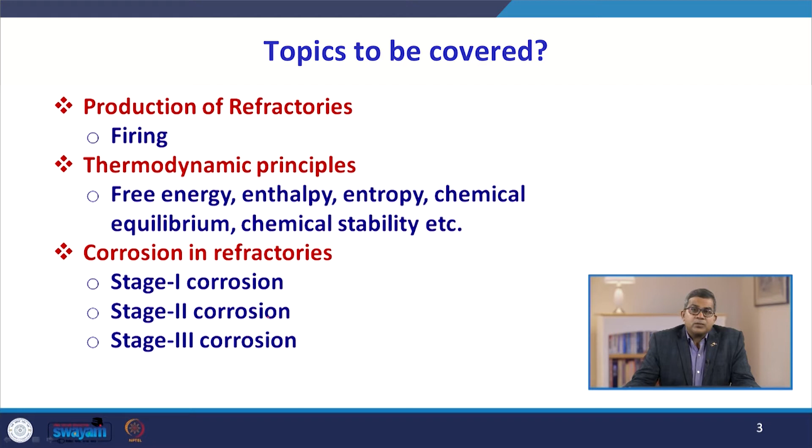In this lecture we are going to discuss the concept of production of refractories. Under this we will discuss the firing aspect, then the thermodynamic principle, which is the theoretical backbone of refractories. Under this we will discuss free energy, enthalpy, entropy, chemical equilibrium, chemical stability, and then the different stages of corrosion - stage 1, stage 2, and stage 3 corrosion. So let us start with the firing.

It is the final stage in brick making, and formerly beehive kilns were used for firing. Now newly developed furnaces, those used today, a number of furnaces are arranged side by side.

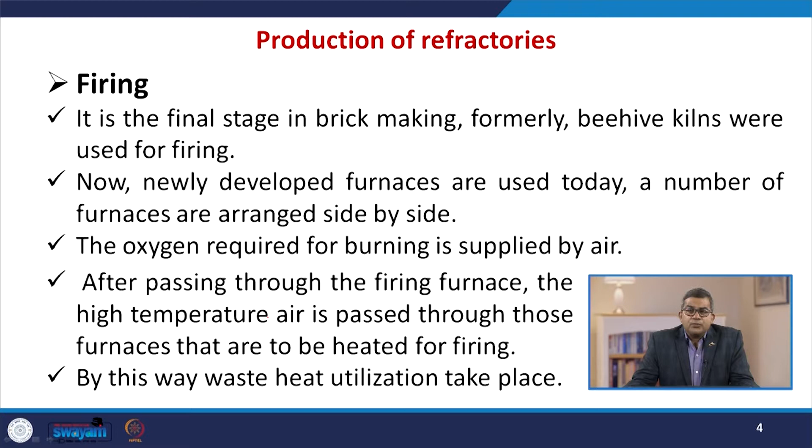Since during firing oxygen is the key component, the oxygen required for burning is usually supplied through air. After passing through the firing furnace, the high temperature air is passed through those furnaces that are to be heated for firing. This way waste heat utilization takes place.

Second type of furnace used for firing is similar to the tunnel kiln, which we discussed in the previous lecture, used for drying. In this, the stock moves through tunnel kilns which are thermodynamically very efficient counterflow heat exchangers. The firing zone is in the middle of the kiln's length, and the secondary air enters from the exit end.

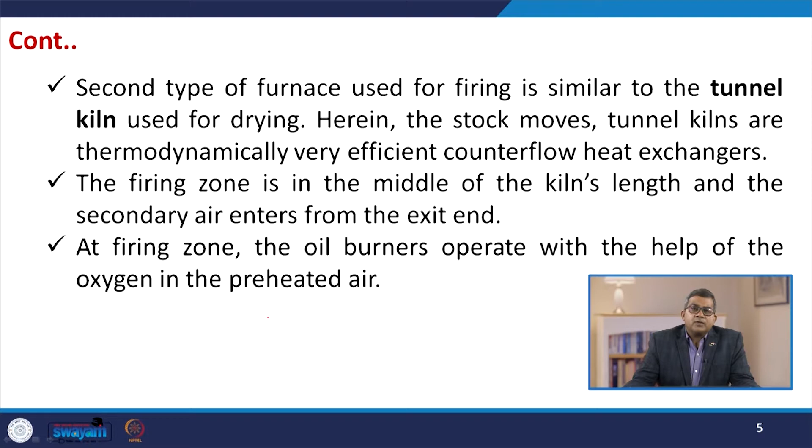At the firing zone, the oil burner usually operates with the help of oxygen in the preheated air. From the firing zone, the combustion products carry heat and pass through the preheating zone. As the green bricks pass through this zone, they absorb heat from combustion products and are preheated. The firing temperature is usually maintained at least as high as the working temperature, for long enough to ensure all possible reactions are completed and dimensional stability is attained.

In recent years, in situ firing has been introduced, that is, the bricks are not separately fired. The green bricks are made and equipment such as a furnace is built, and during the operation of the furnace, the bricks get fired.

Here you see this is the tunnel kiln. As we discussed previously, there is a preheating zone, a firing zone, and a cooling zone, and the movement usually goes in this particular direction. This figure shows the cross section of the firing zone - here you see the gas or oil burner, with the help of a sand seal.

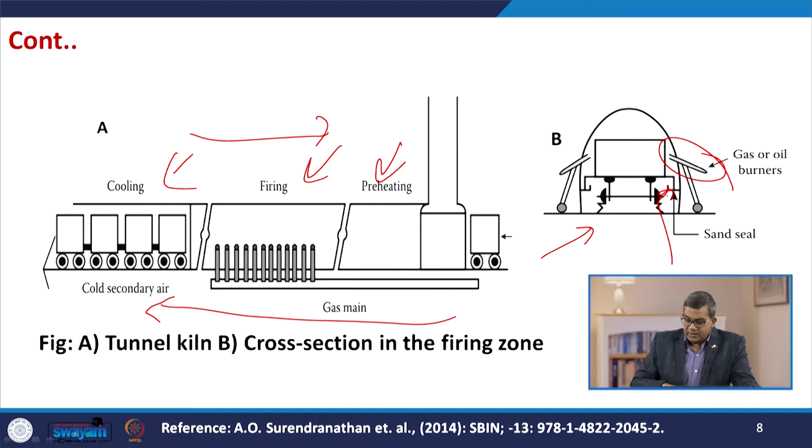Now let us discuss the thermodynamic principles. The refractories are meant to be exposed to high temperature, which causes many changes that result from the refractories' reaction with the environment. The environment can be in the form of solid, liquid, or gas. The reaction takes place where the refractories and environment make contact.

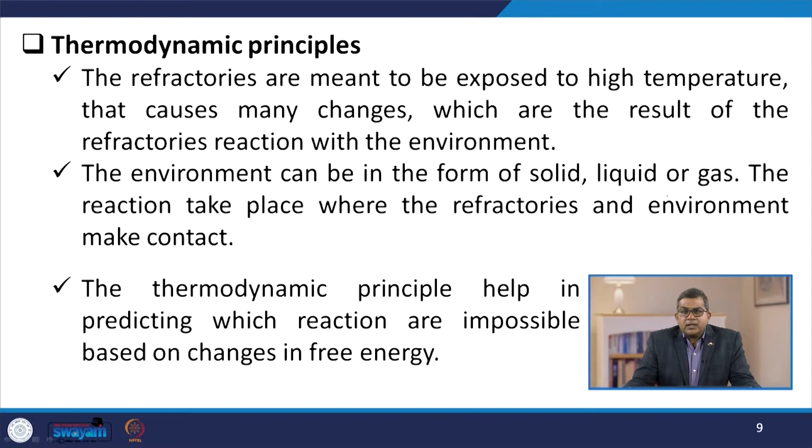The thermodynamic principle helps in predicting which reactions are impossible based on changes in free energy. It is obtained by subtracting the free energy of the reactant from the free energy of the product. In the case where the free energy change is positive, it is impossible for such a reaction to take place spontaneously. This happens because any system will try to acquire a state of lowest energy.

Therefore, the free energy becomes an important term in the field of thermodynamics. Now, let us talk about the free energy. What is defined by free energy? This can be seen in the Gibbs free energy function, which consists of two terms, enthalpy and entropy.

Let us have a brief outlook about the enthalpy. The enthalpy of a compound at any temperature is its heat of formation from its element at that particular temperature. Now, at constant pressure, the enthalpy of a substance can be defined as the heat absorbed or released by it.

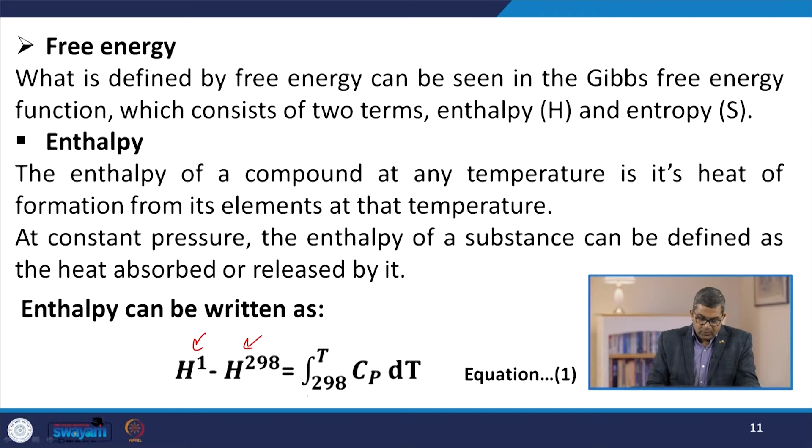Now, enthalpy, you can write the enthalpy as HT minus H298, that is at 298 Kelvin temperature, is equal to the integration from 298 to T of Cp dt, and that is equation number 1.

Now, Cp is the heat capacity at constant pressure, which can be written in the form of change in enthalpy with respect to temperature at constant pressure. So Cp is equal to dH over dT at constant pressure, that is equation number 2.

Now, if we integrate this equation at two different temperatures, say from T1 to T2, or the standard temperature 298 Kelvin and T, the equation for enthalpy can be obtained.

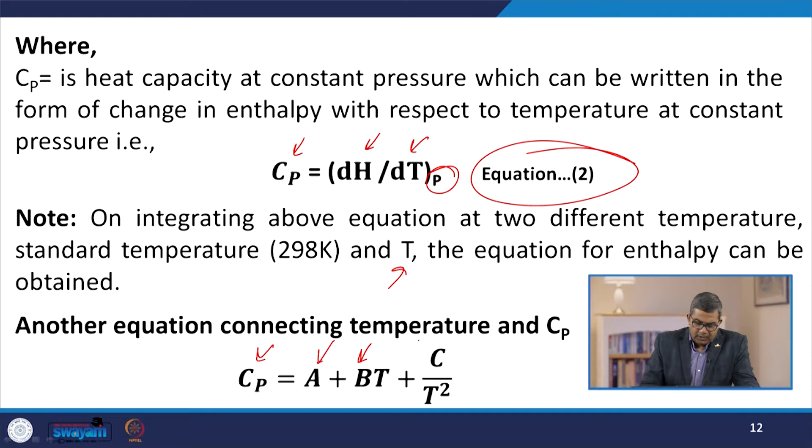Now, another equation connecting the temperature and Cp. Cp is equal to A plus BT plus C over T square. Here, A, B, C are constants.

Entropy measures the degree of disorder in the system. Higher the degree of disorder, higher will be the entropy. Degree of disorder increases with the amount of heat absorbed by the system. Thus, entropy at any temperature is given as the ratio of heat absorbed reversibly by the system and the temperature.

So, in a broad spectrum, entropy can be represented as S is equal to Q over T. In the microscopic zone, the Boltzmann equation is preferred, where K is constant and omega is the measure of randomness. So it can be represented as S is equal to K ln omega.

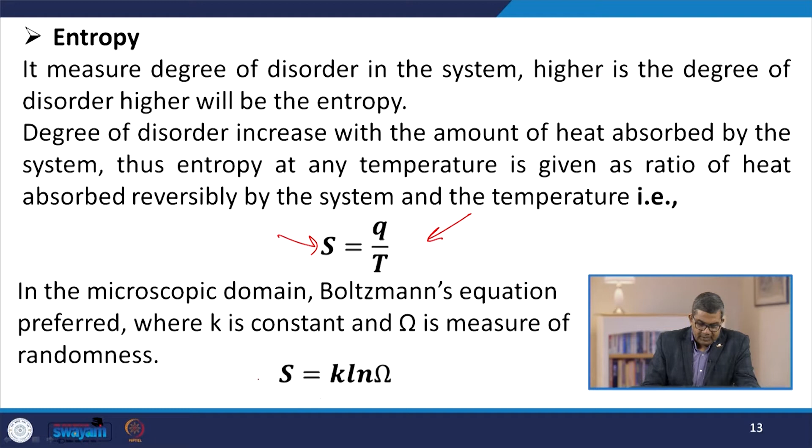Now, entropy can arise by different means, such as configurational entropy, represented as Sc. This is related to the different configuration of atoms in a crystalline lattice. Then thermal entropy, St, this arises from the thermal energy levels possessed by the atom.

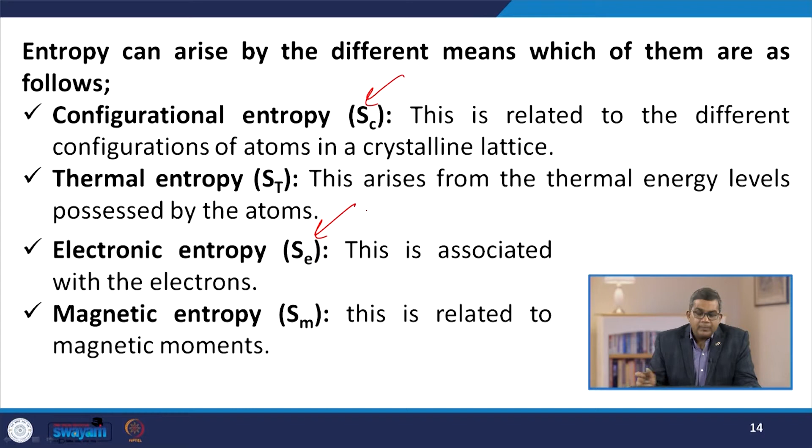Then electronic entropy, represented by Se, this is associated with the electrons. Then the magnetic entropy Sm, this is related to the magnetic moment. Then the dielectric entropy Sd, this concerns the dielectric moment.

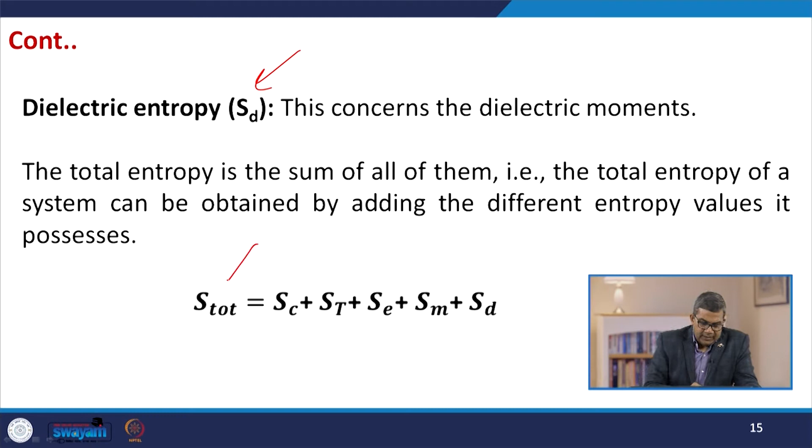The total entropy is the sum of all of them. That is, the total entropy of a system can be obtained by addition of the different entropy values it possesses, like S total is Sc plus St plus Se plus Sm plus Sd.

Let us talk about free energy. Now, the free energy determines the stability of any system, and the stability is associated with equilibrium. At equilibrium, the system will be at its lowest free energy value. The free energy is determined by the equation G is equal to H minus TS.

Now here the S represents the total entropy of the system. If any change takes place in the free energy at constant temperature, this equation can be written as delta G is equal to delta H minus T delta S.

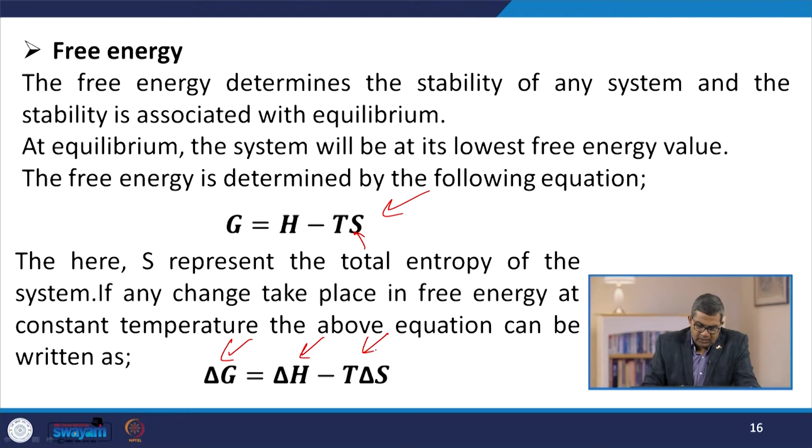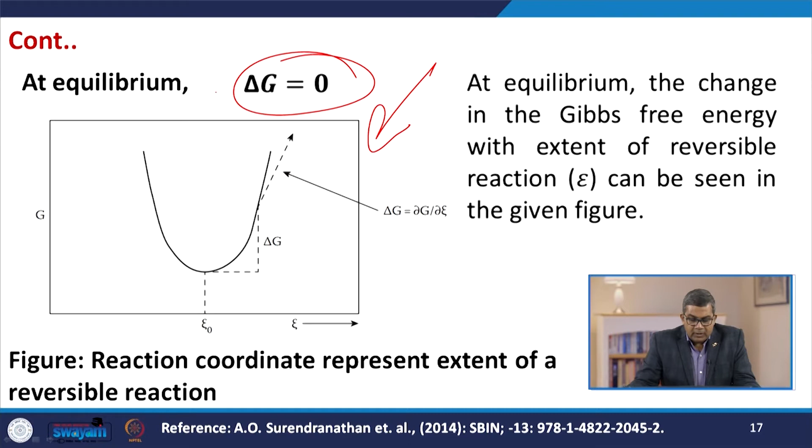So now here at equilibrium, the change in the Gibbs free energy, and this delta G refers to the change in Gibbs free energy. So at equilibrium, the change in the Gibbs free energy with the extent of reversible reaction psi can be seen in this particular figure. Now at equilibrium, it is quite evident that delta G is equal to 0.

Now let us talk about the chemical equilibrium. It is associated with the chemical equation. Now to explain, let us consider a chemical reaction. Let us say that half X2 in the gaseous form, plus M in the solid form, gives MX in the solid form.

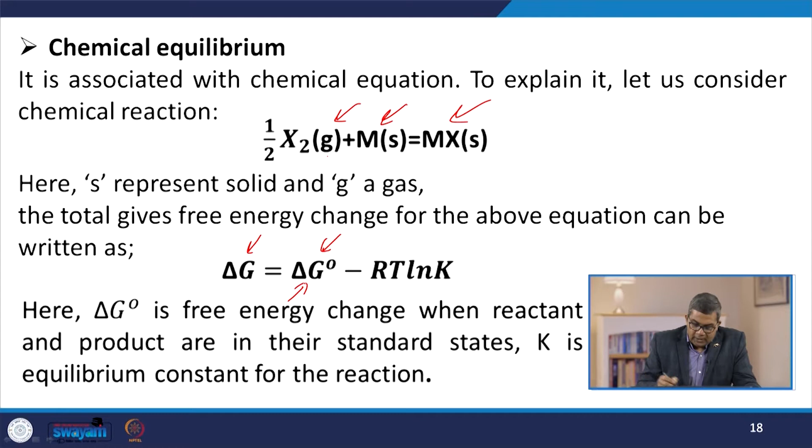Now this gives the free energy change for the above equation. This can be written as delta G, that is the change in the Gibbs free energy, is equal to delta G naught minus RT ln K. Here, delta G naught is the free energy change when reactant and product are in their standard state, and K is the equilibrium constant for the reaction.

Now the equilibrium constant K for this particular reaction can be written as K is equal to AMX over AM into PX2 to the power half. That is the mass action expression.

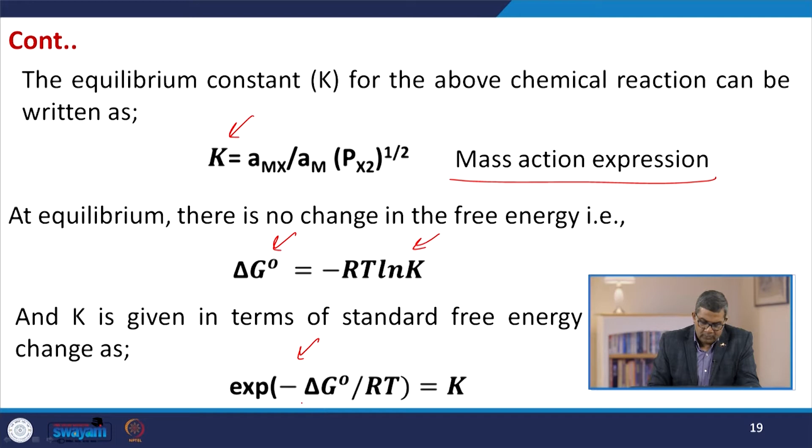Now at equilibrium, as we understand, there is no change in the free energy, and delta G naught is equal to minus RT ln K, where K is given in terms of the standard free energy change, and it can be expressed as K is equal to exponential of minus delta G naught over RT.

Now let us consider the oxidation of any metal M. If it forms two types of oxides like MOZ and MOY, where Y is greater than Z, consider the oxidation reaction of M to form its lower oxide: M plus Z by 2 O2 is equal to MOZ. Let the standard free energy for this reaction be delta G1 naught.

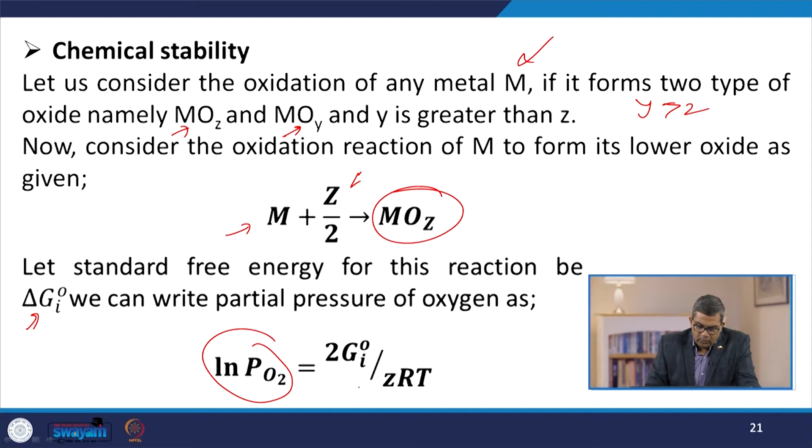So we can write the partial pressure of oxygen as ln PO2 naught is equal to 2 delta G1 naught over ZRT. Now further oxidation of MOZ gives MOY: 2 over Y minus Z into MOZ plus O2 is equal to 2 over Y minus Z MOY.

Now the corresponding partial pressure of oxygen can be represented as ln PO2 is equal to 2 delta G2 naught over ZRT. Here delta G2 naught value is given as delta G2 naught is equal to 2 over Y minus Z delta GMOY naught minus delta G1 naught.

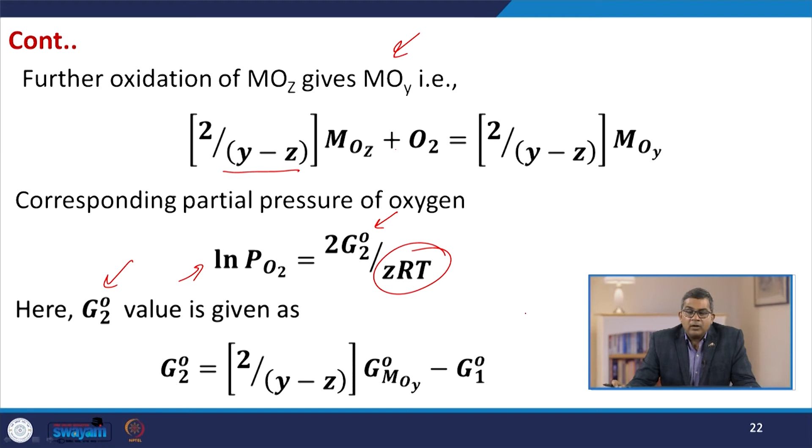This G naught represents the standard condition. In this equation, delta GMOY naught is the standard free energy change for the formation of MOY. Thus, the chemical stability domain for MOZ at temperature T lies between the partial pressures of oxygen corresponding to delta G1 naught and delta G2 naught.

Now let's talk about the corrosion of refractories. Refractories are used at elevated temperatures for structural purposes, and in many cases to contain a high temperature corrosive environment. This corrosive environment usually contains liquid, that is in the melted phase, and that participates in chemical reaction with the refractory at elevated temperatures, resulting in refractory consumption or wear. The oxidation and reduction state of the environment can participate in and influence the chemical reaction.

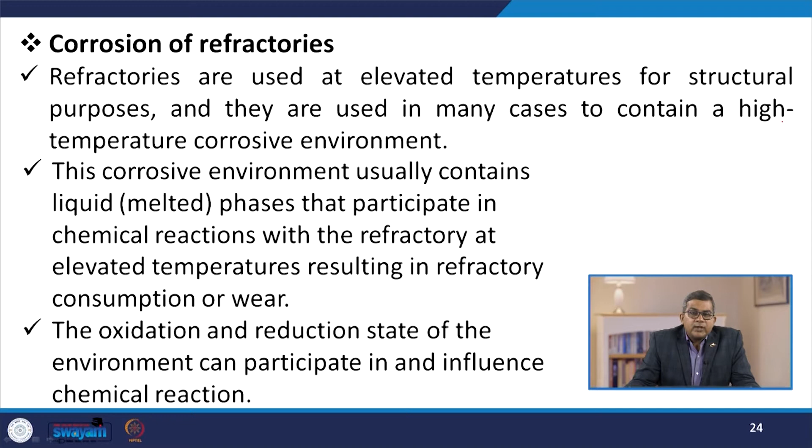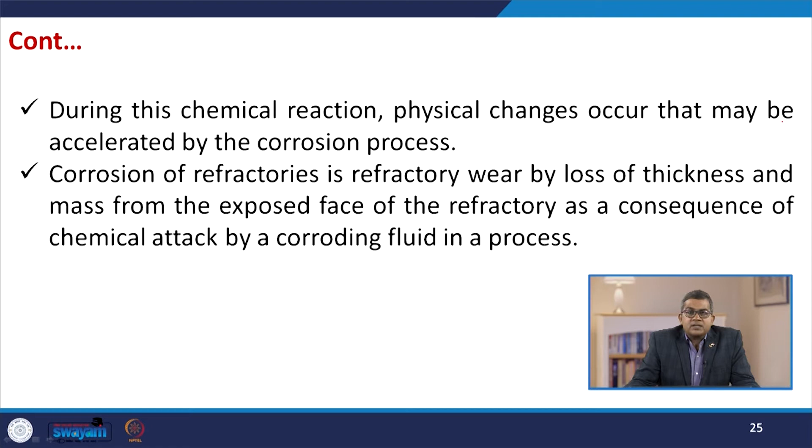During this chemical reaction, physical changes occur that may be accelerated by the corrosion process. Corrosion of refractories is the refractory wear by loss of thickness and mass from the exposed face of the refractory, as a consequence of chemical attack by a corroding fluid in a process. In this, the refractory and corroding fluid react together, approaching chemical equilibrium in the zone of contact between the refractory and the fluid.

The phase equilibrium diagram can be used to analyze the corrosion situation and to predict the chemical strategies to minimize the corrosion and wear rates.

Now, while discussing corrosion, let's talk briefly about the fundamental principles of corrosion. There are fortunately a few fundamental principles that the investigator can apply to any corrosion situation. The first fundamental principle is on refractory and slag compatibility.

The first fundamental principle is that acid refractories tend to resist acid slag better than basic slag, and conversely the basic refractories tend to resist basic slag better than acid slags.

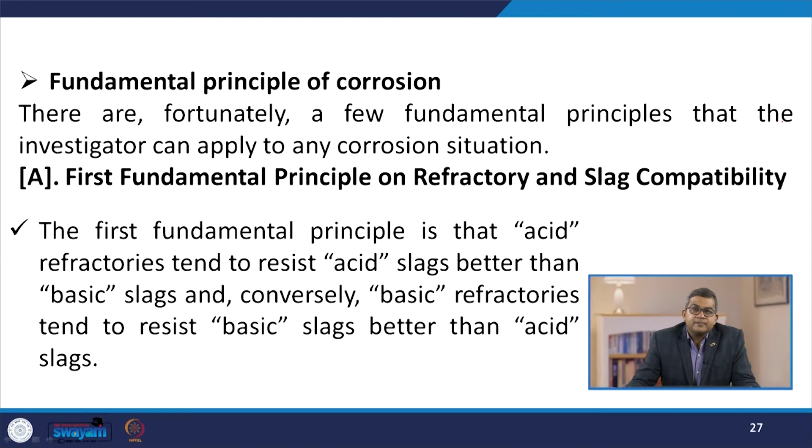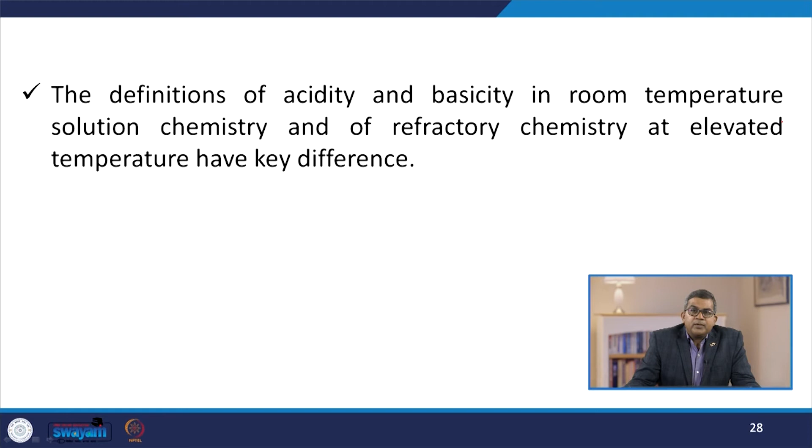The definition of acidity and basicity in room temperature solutions and in refractory chemistry at elevated temperature have a key difference. Now, the definition of acidity and basicity in solution chemistry at room temperature.

An acid contains an excess of hydrogen ions H+ over hydroxyl ions OH-, considering the baseline defined as neutrality at pH of 7. An acidic substance contributes hydrogen ions to a chemical solution to make it more acidic, whereas a basic substance contributes hydroxyl ions to make it more basic.

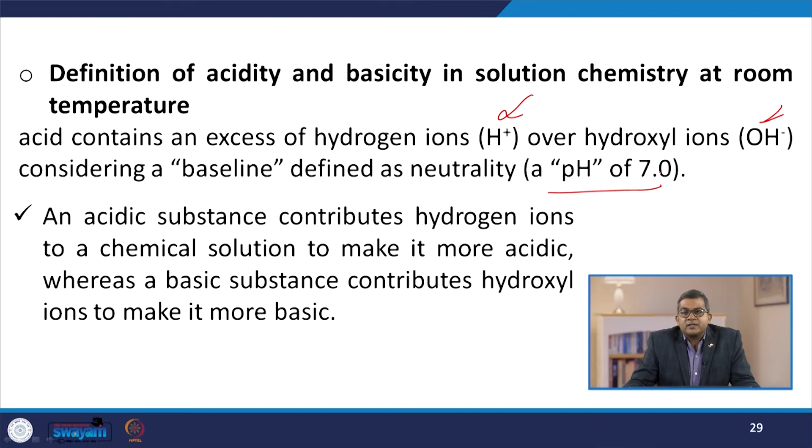Now, an acidic material contains an excess of silica content SiO2 over a basic material, usually in this case calcium oxide CaO, considering a baseline defined as neutrality at a CaO over SiO2 ratio of 1.

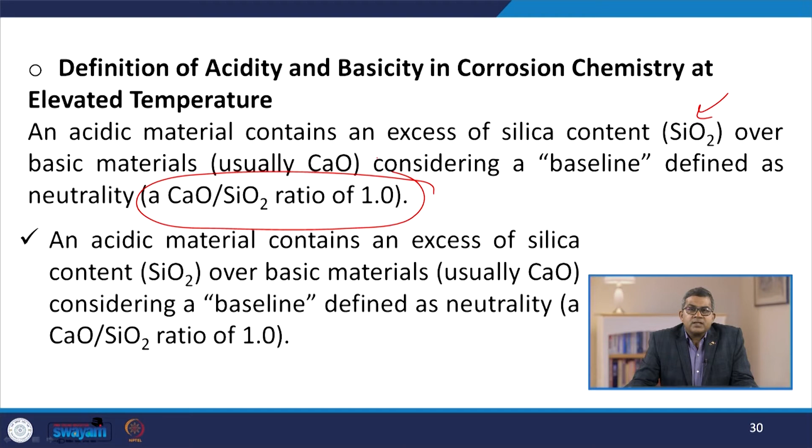This led to an observation that acid refractories are more compatible with acid slag or vice versa. There are more complex definitions of acidity and basicity for high temperature chemistry than those given previously. In steel refining, the term V ratio is used, where a ratio exceeding 1.0 implies a basic chemistry and a ratio below 1.0 implies acid.

How can we define or express the V ratio? The V ratio is expressed as V equals CaO plus MgO plus FeO plus MnO and so on, over SiO2 plus P2O5 plus Al2O3 plus Fe2O3 plus Mn2O3 and so on.

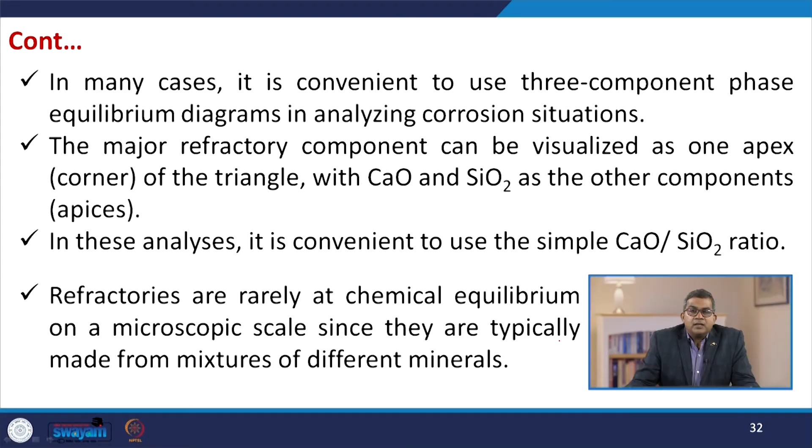In many cases, it is convenient to use the three-component phase equilibrium diagram in analysis of corrosion situations. The major refractory component can be visualized as one apex of the triangle, with CaO and SiO2 as the other components. In this analysis, it is convenient to use the simple CaO over SiO2 ratio. The refractories are rarely in chemical equilibrium on a microscopic scale, since they are typically made from a mixture of different minerals.

This is the second fundamental principle: porosity and corrosion rates. Most refractories contain voids or porosity. This may be open pores that can be penetrated by a fluid media, called apparent porosity, or it may be closed porosity that is not easily penetrated by fluid media.

If a refractory contained no porosity, brick joints, expansion joints, or construction joints, the corrosion reaction would be limited only to the phase exposed to the corrosive media, called the hot face. When porosity is present, particularly open porosity, the corrosive media can penetrate the refractory, causing destructive reaction behind the hot face.

The slag corrosion rates increase linearly with the percentage of apparent porosity within the refractory, in a porosity range from 12 to 16% apparent porosity. Higher density refractories exhibit lower wear rates and less spalling resistance, leading to higher wear rates by another process such as thermal shock.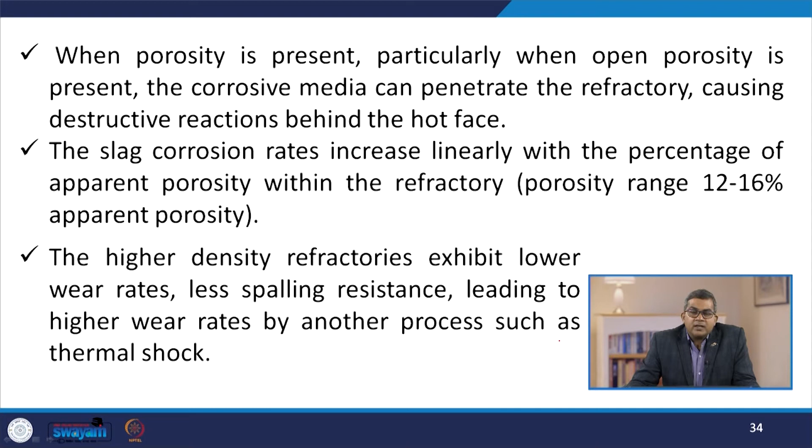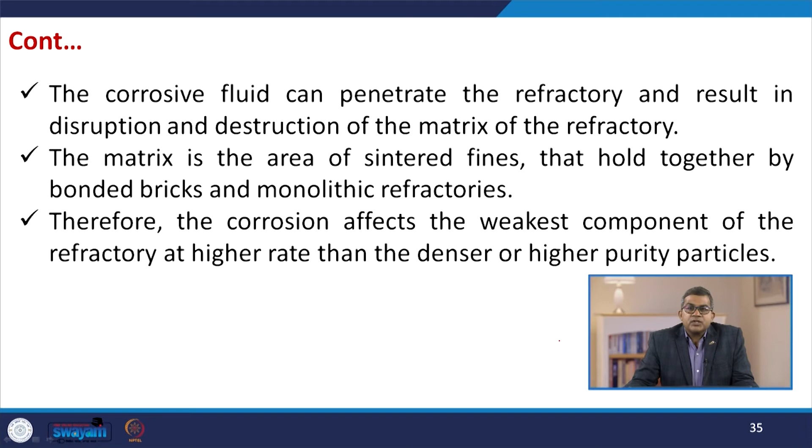Corrosive fluids can penetrate the refractory and result in disruption and destruction of the matrix of the refractory. The matrix is the area of sintered fines that holds together bonded bricks and monolithic refractories. Therefore, corrosion affects the weakest component of the refractory at a higher rate than the denser or higher purity particles.

Phenomenological description of corrosion: it is obvious that the reactive component, hereafter called the slag, must contact the refractory's exposed surface, or hot face, at an elevated temperature. It is at this interface that corrosion begins and continues throughout the life of the lining.

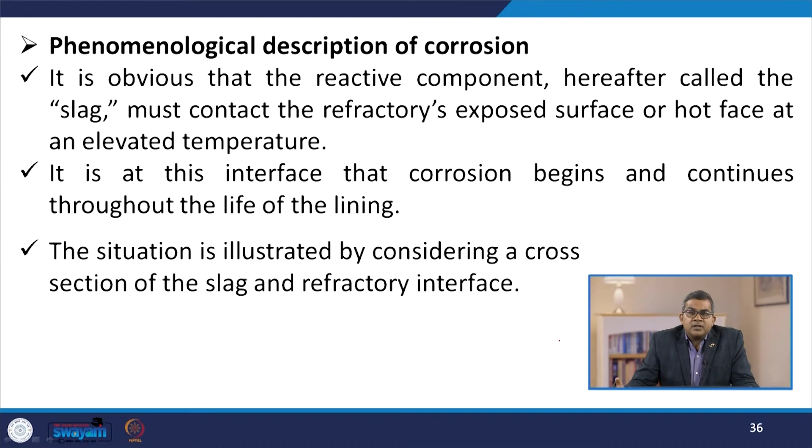We can understand this situation by considering a cross section of the slag and refractory interface. The refractory has a temperature gradient from the hot to cold face, meaning the highest temperature is at the hot face, and the temperature declines across the refractory thickness towards its back or cold side.

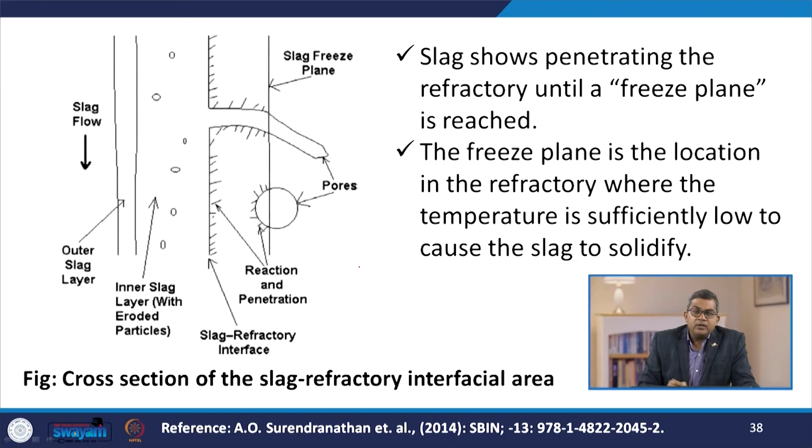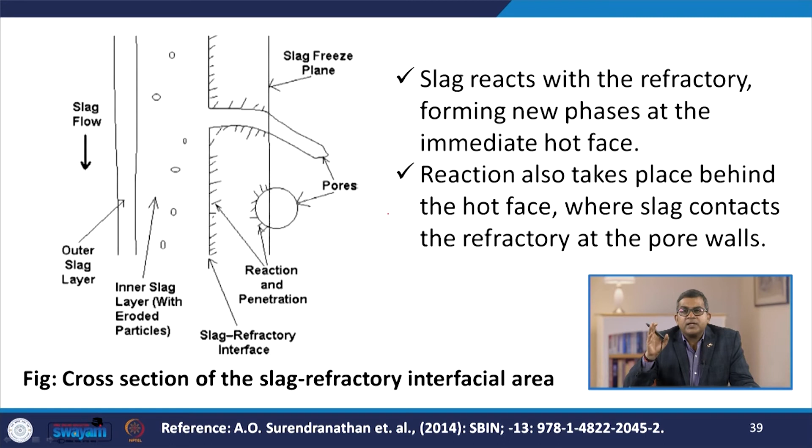Here you see the cross section of the slag refractory interfacial area. The slag shows penetration into the refractory until the freeze plane is achieved. The freeze plane is the location in the refractory where the temperature is sufficiently low to cause the slag to solidify. The slag reacts with the refractory, forming new phases at the immediate hot face. Reactions may also take place behind the hot face, where slag contacts the refractory at the pore walls.

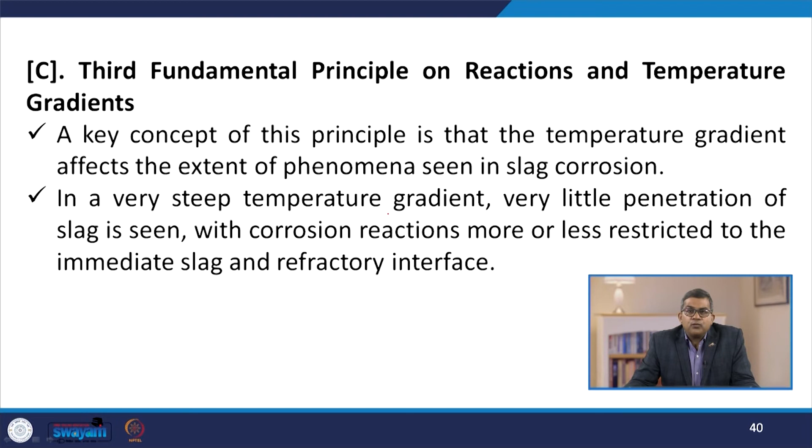This is the third fundamental principle: reaction and temperature gradients. A key concept is that the temperature gradient affects the extent of phenomena seen in slag corrosion. In a very steep temperature gradient, very little penetration of slag is seen, with corrosion reaction more or less restricted to the immediate slag and refractory interface.

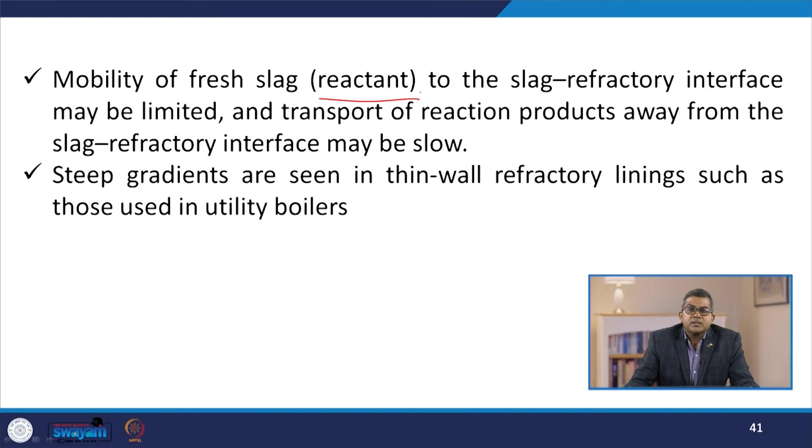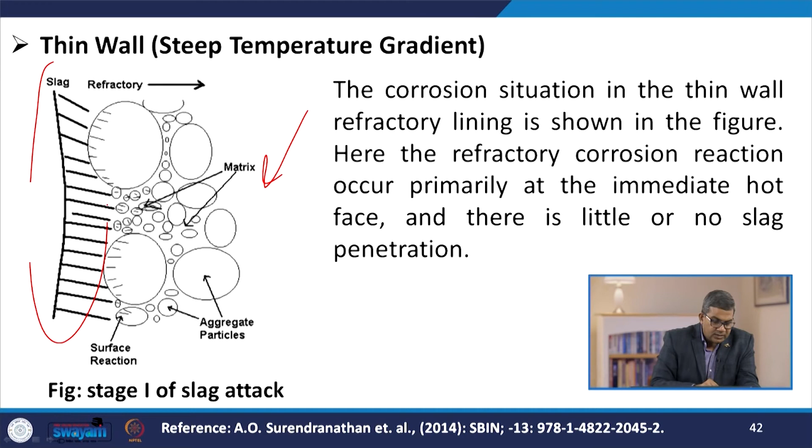The refractory corrosion reaction occurs primarily at the immediate hot face, with little or no slag penetration. Here you see the slag zone in this figure. Microscopic examination usually shows that the penetration is confined to a depth of less than 100 microns, or 0.1 mm, behind the exposed hot surface.

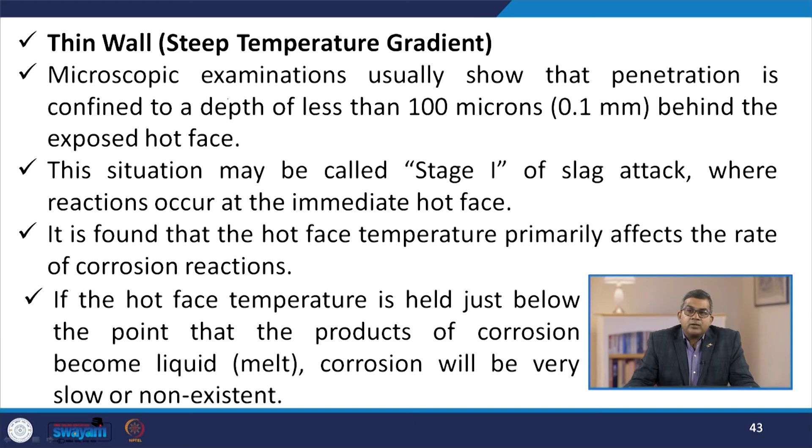This situation may be called stage 1 slag attack, where the reaction occurs at the immediate hot face. It is found that the hot face temperature primarily affects the rate of corrosion reaction. If hot face temperature is held just below the point where the corrosion product becomes liquid, corrosion will be very slow or non-existent.

Most authorities believe that if the hot face is maintained at not more than 20 degrees Celsius above the melting temperature—called the lowest eutectic temperature—reasonable corrosion rates will be observed. However, when the hot face temperature is more than 20 degrees Celsius above the eutectic temperature, corrosion is rapid.

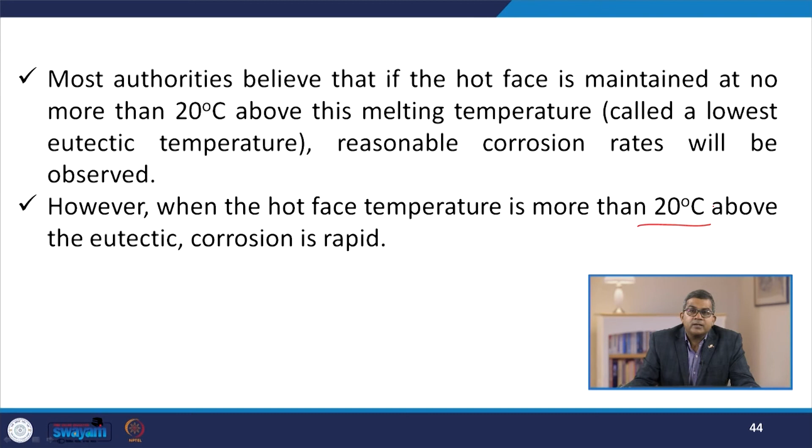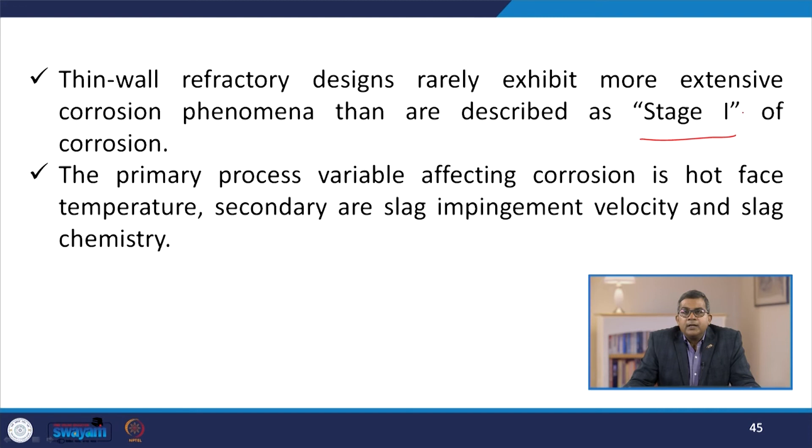Thin wall refractory designs rarely exhibit more extensive corrosion than described in stage 1. The primary process variable affecting corrosion is hot face temperature, with secondary variables being slag impingement velocity and slag chemistry. Now let us talk about thick wall designs, which have a relatively broad temperature gradient.

Thick wall refractory designs begin to exhibit corrosion on their initial coating of slag at elevated temperature. In time, extensive corrosion of the refractory takes place, so that the refractory reaches stage 2 of corrosion. Stage 2 is characterized by two phenomena.

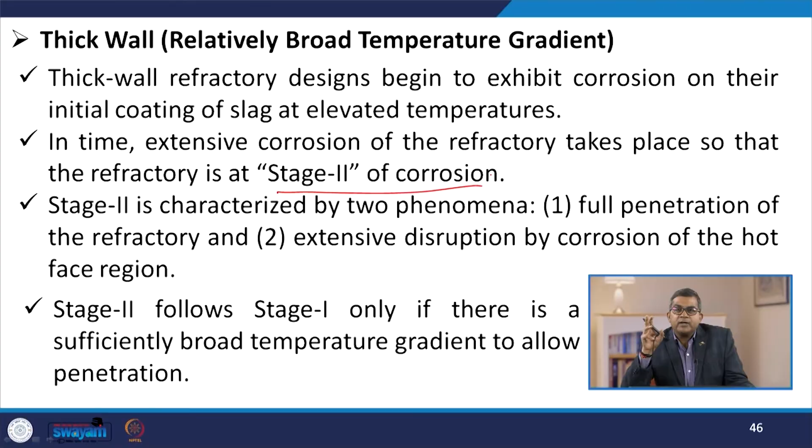One is the full penetration of the refractory, and second is the extensive disruption by corrosion of the hot face region. Stage 2 follows stage 1 only if there is a sufficiently broad temperature gradient to allow penetration. Here you see stage 2 of the corrosion process, showing a bonded refractory.

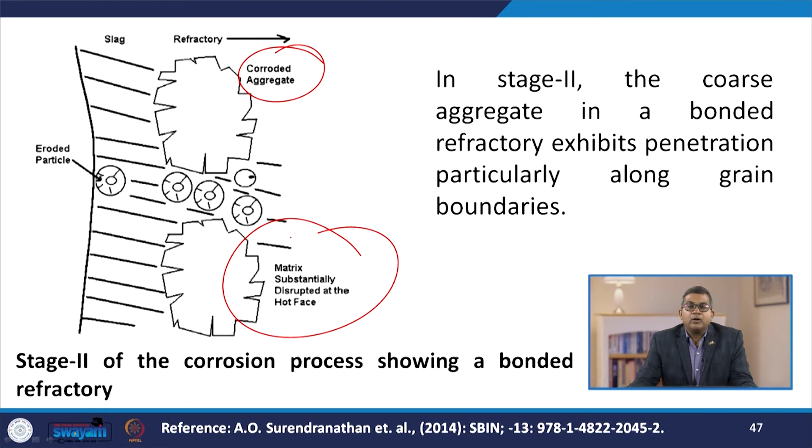In stage 2, the coarse aggregate in the bonded refractory exhibits penetration particularly along the grain boundary. Here you see the corroded aggregate, and the matrix is substantially disrupted at the hot face. The direct bonding between the matrix and aggregate particle is disrupted, but this bonding still exists.

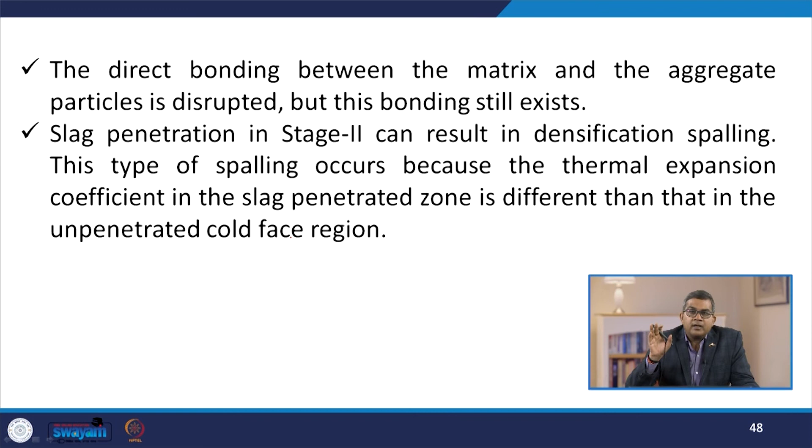The slag penetration in stage 2 can result in densification spalling. This type of spalling occurs because the thermal expansion coefficient in the slag penetrated zone is different than that in the unpenetrated cold face region.

So, on continued thermal excursion, whether cooling or heating, spalling can occur at the line of demarcation between the penetrated and unpenetrated areas. The residual lining after spalling then begins the corrosion process anew, progressing from stage 1 to stage 2 again.

Let us have a brief outlook about stage 3 corrosion. At the end of the refractory lining's life, or in case of relatively slow corrosion rates where densification spalling has not taken place, the refractory hot face zone may progress to a final stage of corrosion, called stage 3 corrosion.

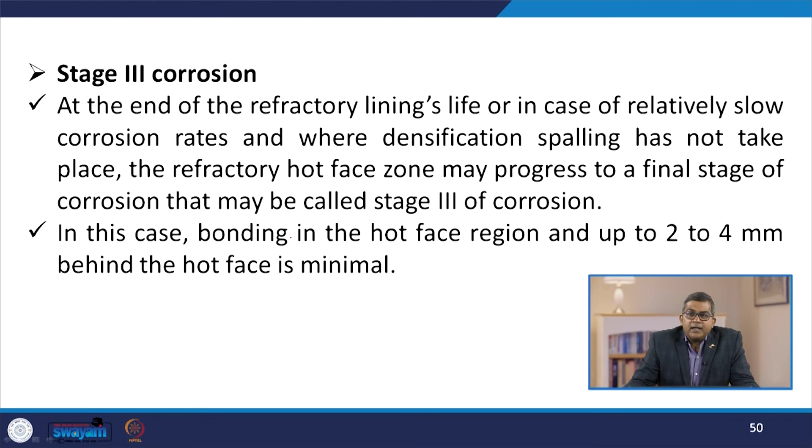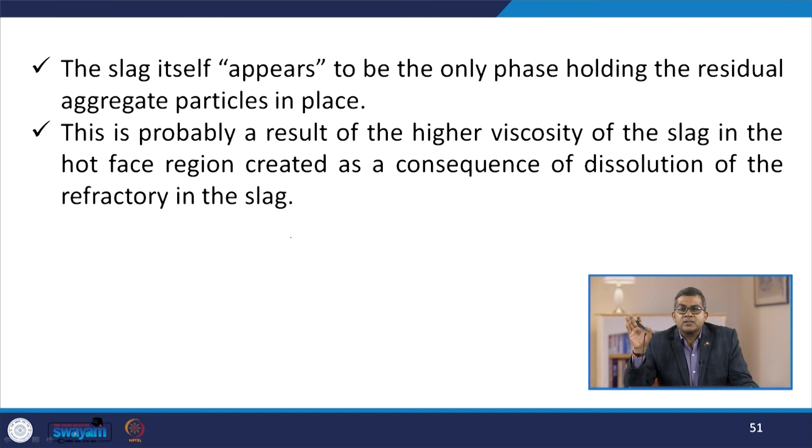In this case, the bonding in the hot face region, up to 2 to 4 mm behind the hot face, is minimal. The slag itself appears to be the only phase holding the residual aggregate particles in place. This is probably a result of higher viscosity in the slag at the hot face region, created as a consequence of dissolution of the refractory in the slag.

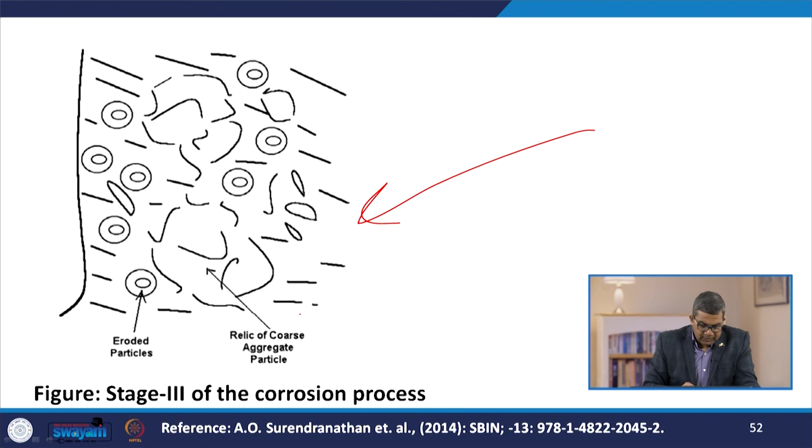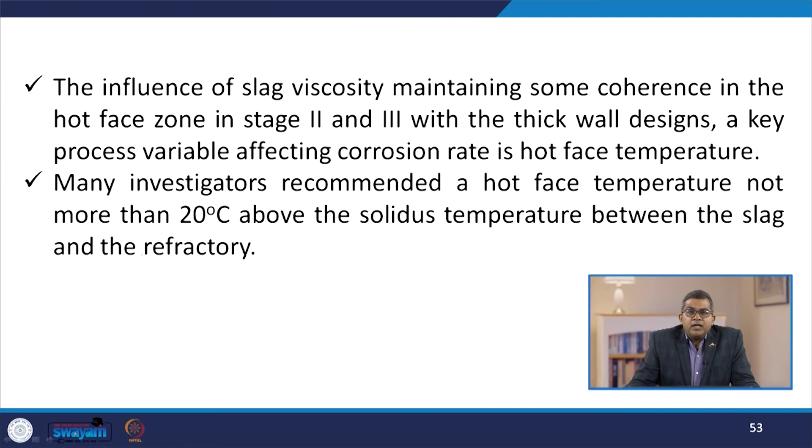Here you see stage 3 of the corrosion process, showing the relic coarse aggregate particles and the eroded particles. The influence of slag viscosity maintains some coherence in the hot face zone in stages 2 and 3. With the thick wall design, a key process variable affecting corrosion rate is hot face temperature.

Many investigators recommend a hot face temperature not more than 20 degrees Celsius above the solidus temperature between the slag and refractory zone. In this lecture, we have discussed the various thermodynamic concepts pertaining to refractory operation.